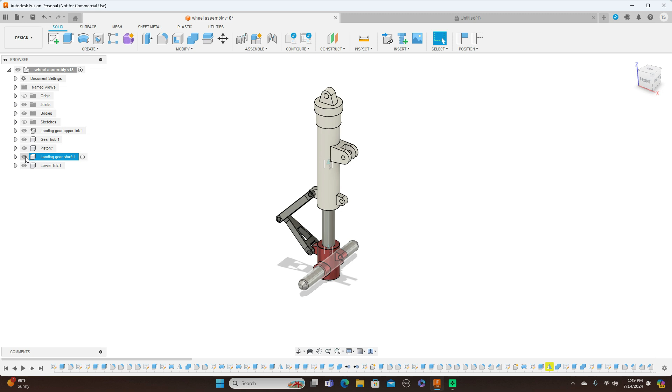Today I'm going to show you first how to do the lower link, and I'll show you what the lower link is here. Let me turn all this stuff off. Okay, and that lower link, we're going to make this today. So let's go ahead and get started here.

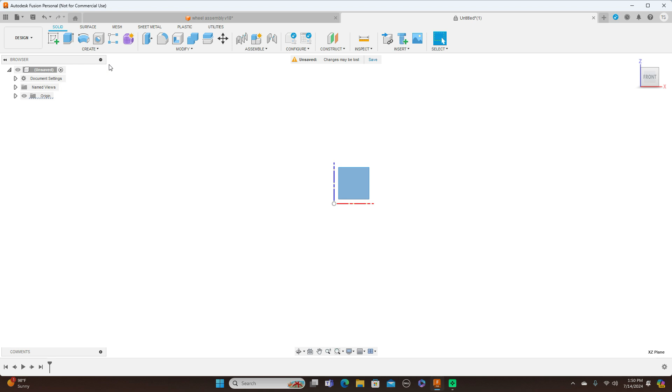Going to do this on the front plane here. Turn the origin back on so I can see it, and click this, because this is the plane I want to sketch on, and create sketch. Use the line tool, L for line. Want this line to be 10 millimeters.

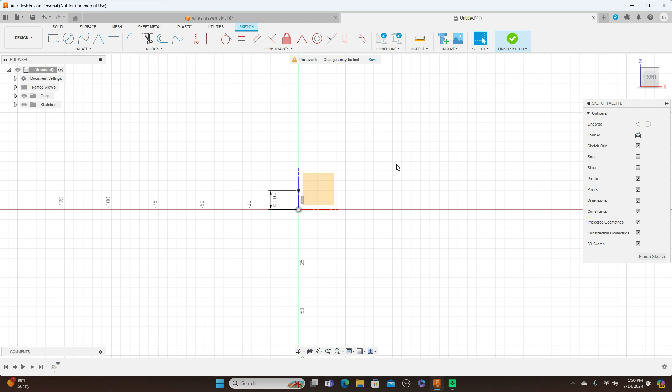Then I'm going to draw another line here. And I want this line from this line here to be 180 millimeters. So I'll come up here to this. Like that, that. And I want this to be 180.

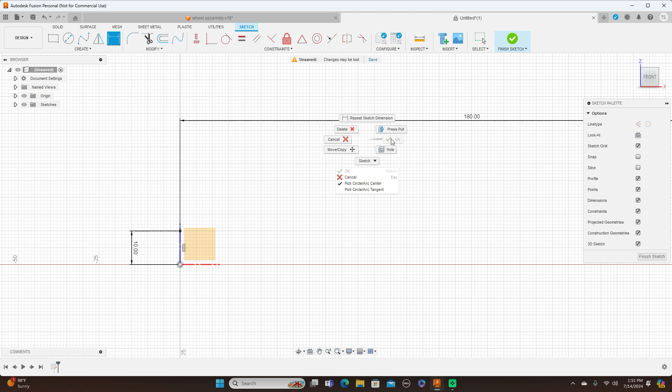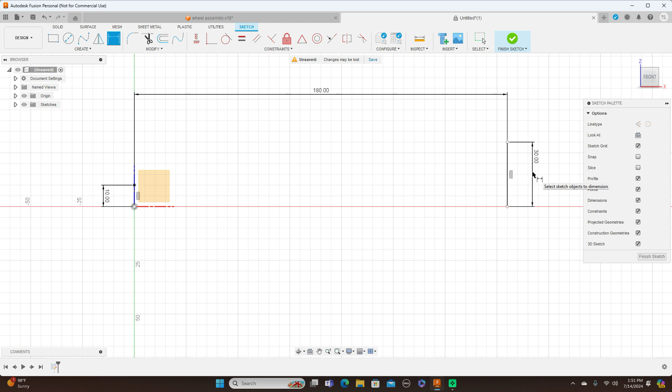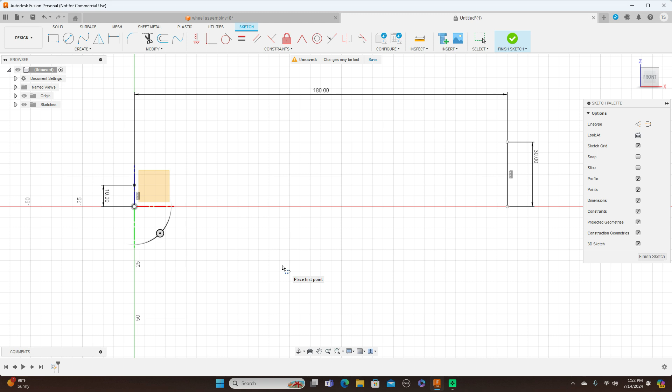And I want this line to be 30 millimeters long. And building this assembly is all parametric modeling. And now I want to draw another line. 15.

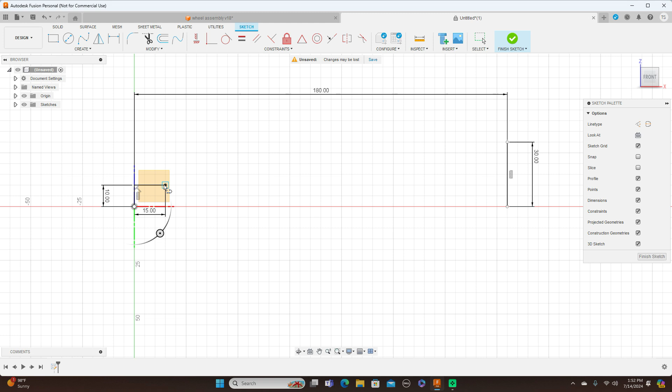Right now, this is just an approximation. And I want a line from here, 30 millimeters long. And I want a line from the bottom up here, 15 millimeters.

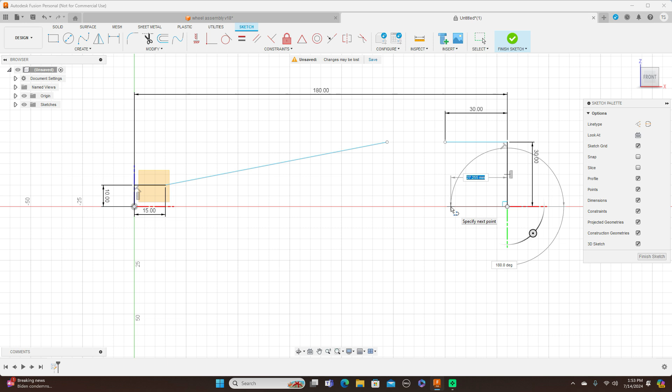Actually, I'm going to do one here first. And I want this 30. Up here, 15.

Delete this line here, don't need it. And trim this line here, I don't need this bottom half here. So T for trim, click that line, deletes that.

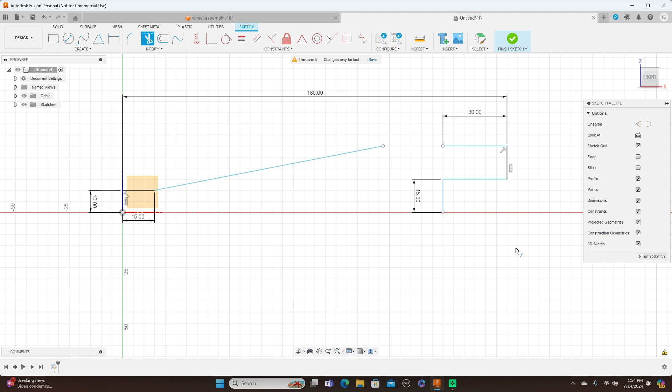And what I'm going to do here, cancel this and delete this line here. And draw a line from here to here.

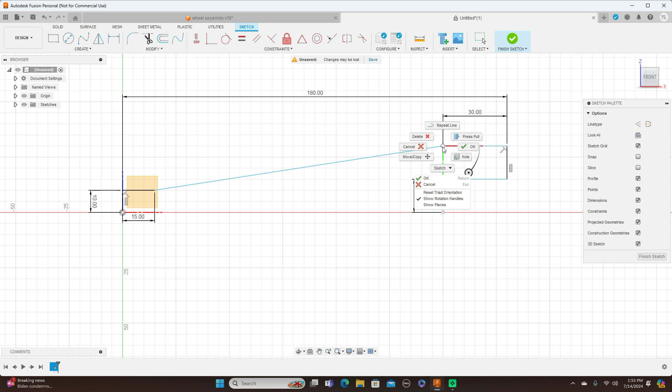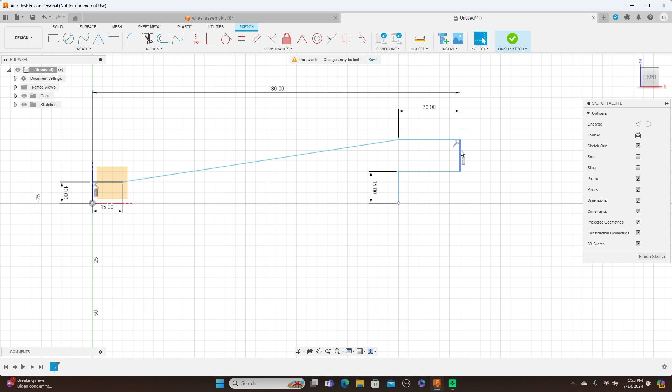Okay, here are our dimensions for this. This is 15 also. So we have this line 15, this line is 30, 15, 30. Overall length is 180, this line is 10.

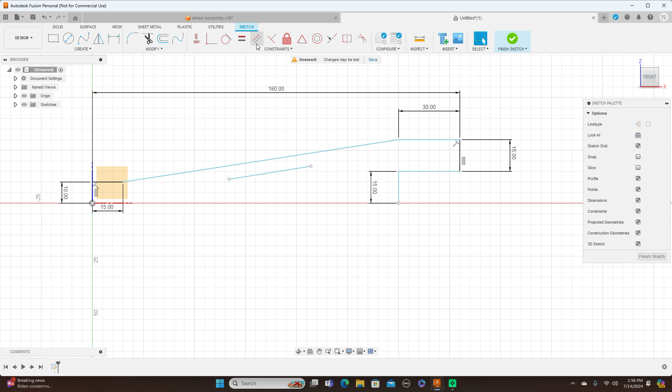Now I'm going to draw a line here. And this is an approximation. Now I want these two lines to be parallel, so I come up here, parallel, click this. Now those lines are parallel. Click OK.

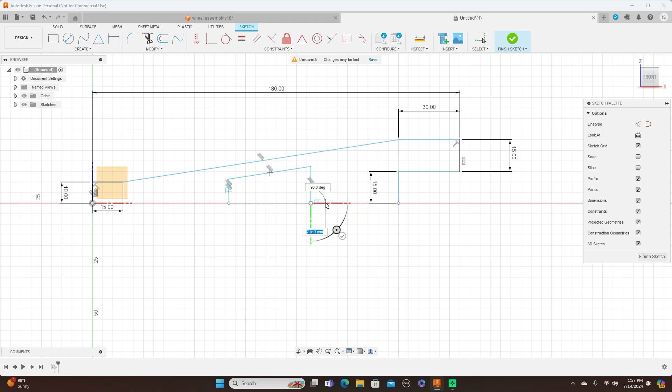Draw another line here. I want the distance from this line to this line to be 70. It moved the wrong one. Go back. Okay, just deleted that so I can do it again.

Don't want that, so I'll do the front one first. Go ahead and delete this, or I don't need to, just go back. Then delete this. So the front one, 20 millimeters between here and here. Okay.

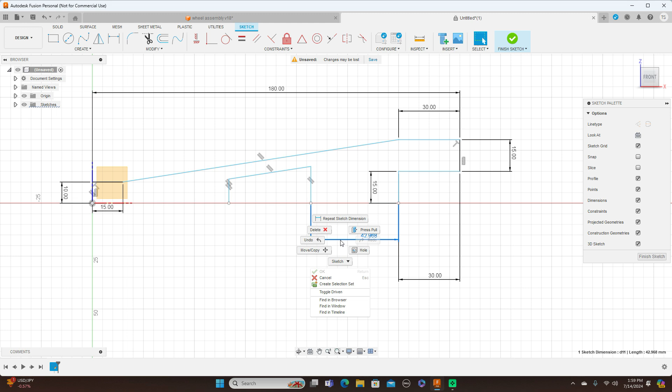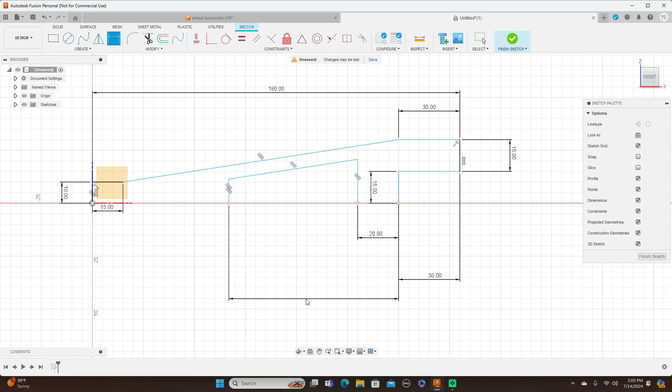And now, this line, I want this to be 20. And the back line, 70. From here to here, I want this to be 70. Okay.

Now we have all our dimensions in here. And what I'm going to do now is mirror all of this.

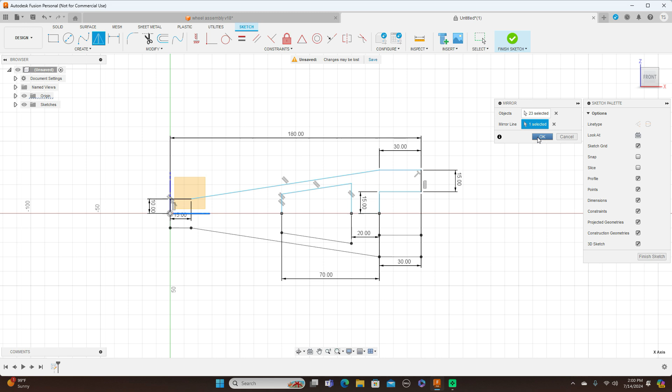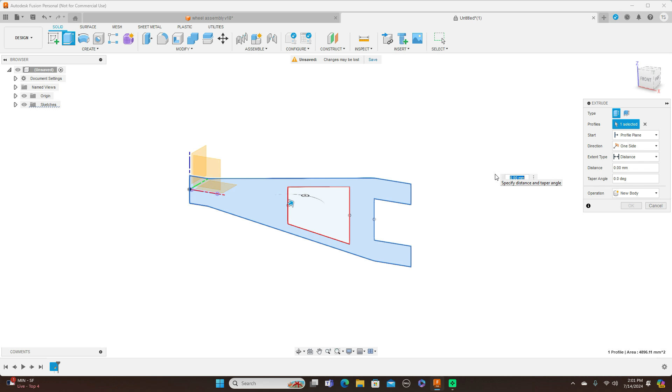Click OK. And this is what we have. Go ahead and finish sketch. Press E for extrude, select this profile here, and I want the thickness to be 25 millimeters. New body, click OK. We have that.

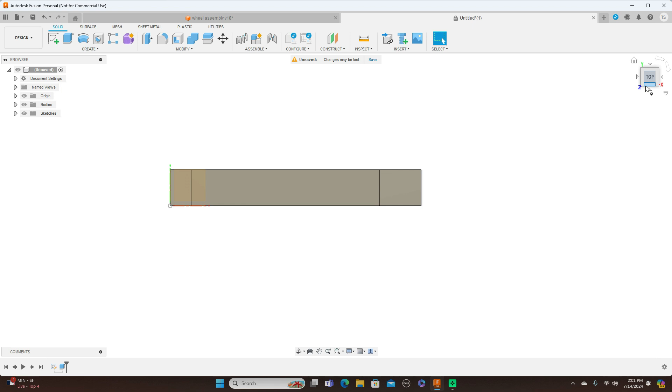Now on the top here, I want to create a sketch up here. Actually, I don't want to create sketches yet. I want to go ahead and add the roundness on these right here.

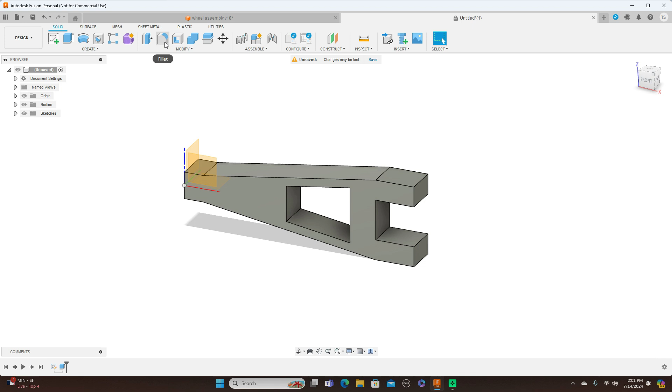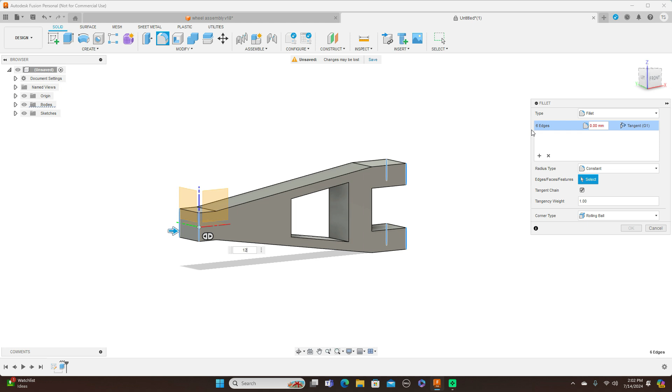So what we can do there to make those round is use a fillet. Come up here to fillet, click that. Click this edge, hold shift down and click these other edges. And I want those to be 12.5. Click OK.

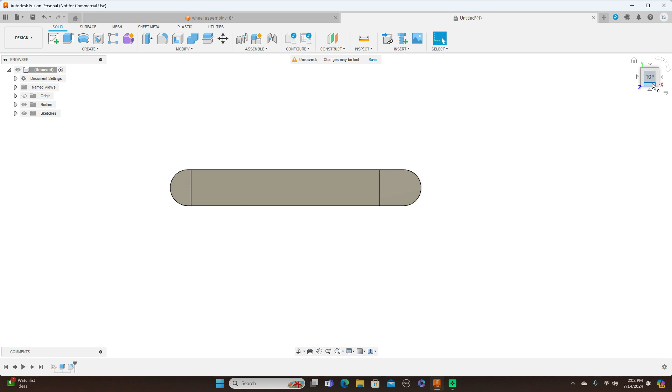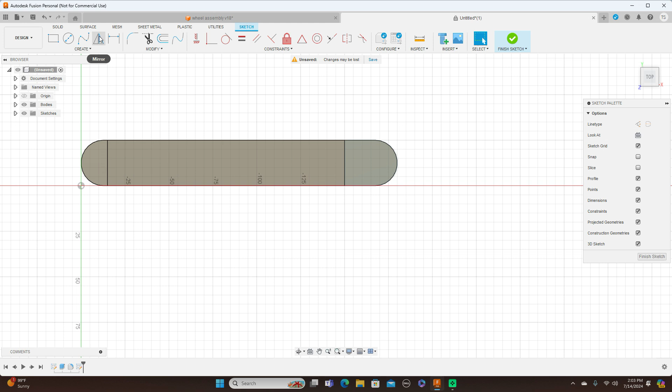Now to put the holes in the top, like here, these holes here. I want to create a sketch on this plane here. Create sketch. And I want to use this as a center. The holes are 15 millimeters. So select this. Click enter. Go ahead and finish sketch.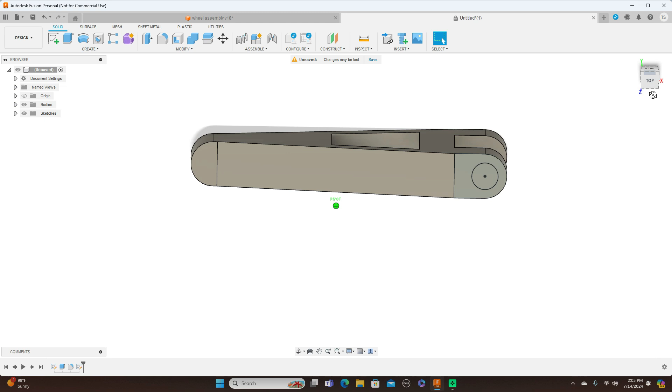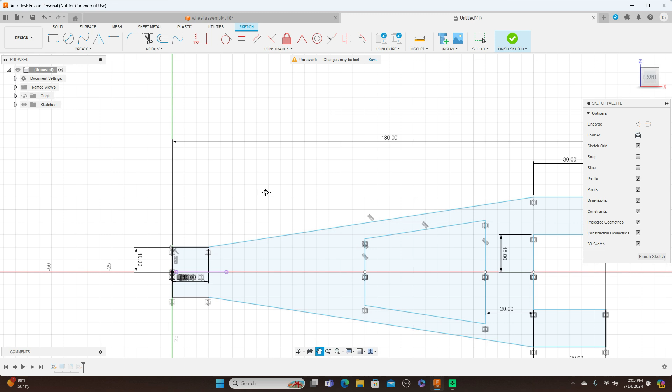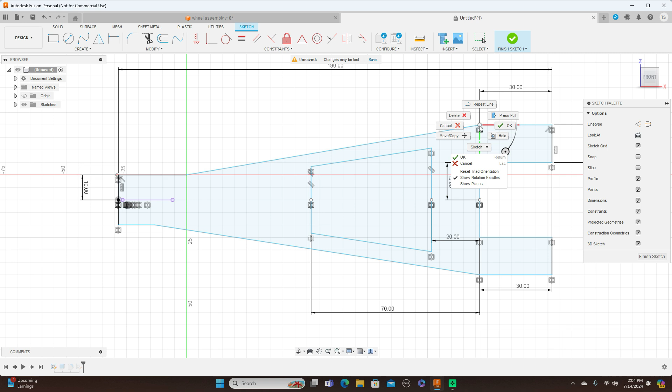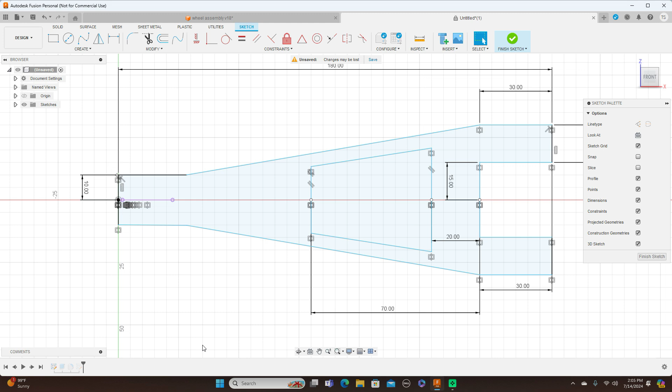Now I don't like this. Let me go back here. Delete this line here. Move this more this way. Go back to that sketch. Just changing this sketch around just a little. There, that's a little better.

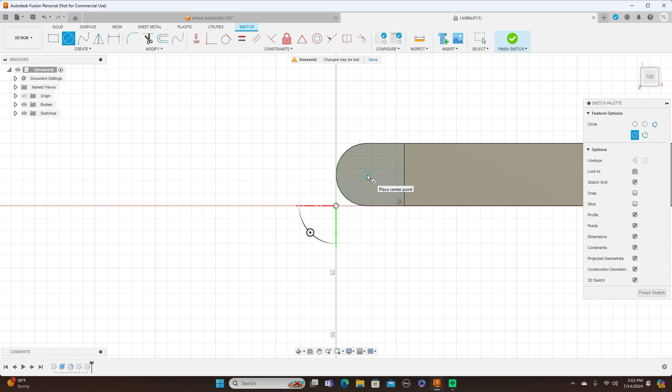Okay, now this plane here, create a sketch on it. And this is 15 also. All right, go ahead and finish sketch.

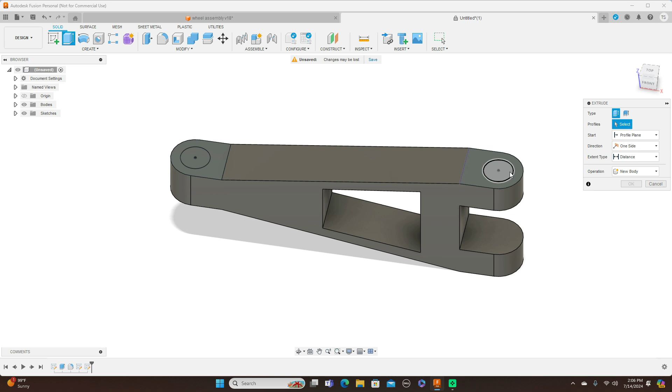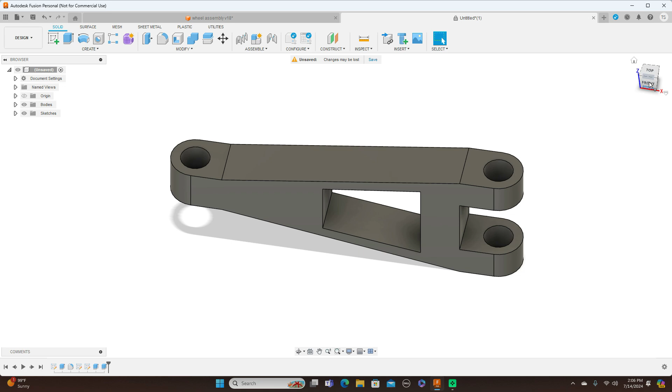And what I want to do now is extrude this here. Set this to cut. Click OK. Extrude again, this one, set this to cut. Down. Click OK. OK.

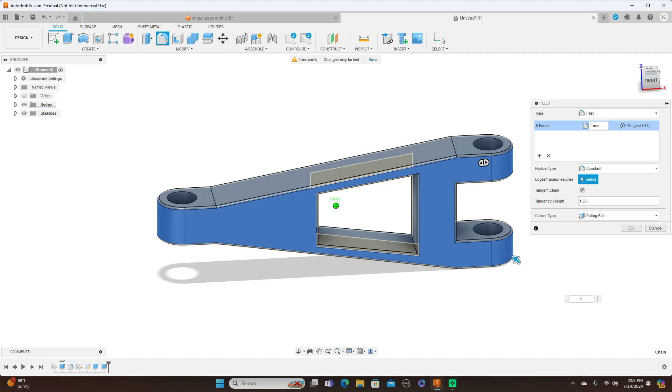Here's that part, still not done yet. Now we need to add some fillets to it. Select 1 millimeter. What I did is just selected the faces, so it did all of them at the same time. Go ahead and click OK.

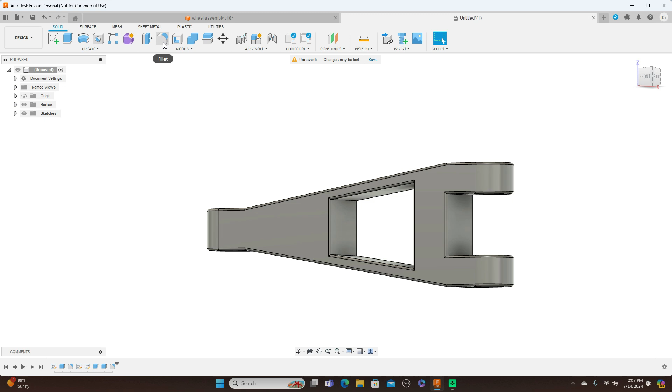Okay, this is the part now. Now what I want to do is just add a fillet in here also. So click fillet. Select this line, this line. And I want this to be 1 millimeter. Click OK.

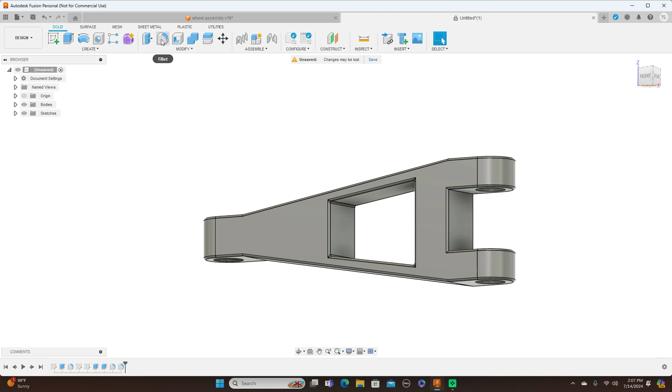And same here, fillet, this line, and I want it to be 1 millimeter. Click OK. OK. And that is our first part, the lower link.

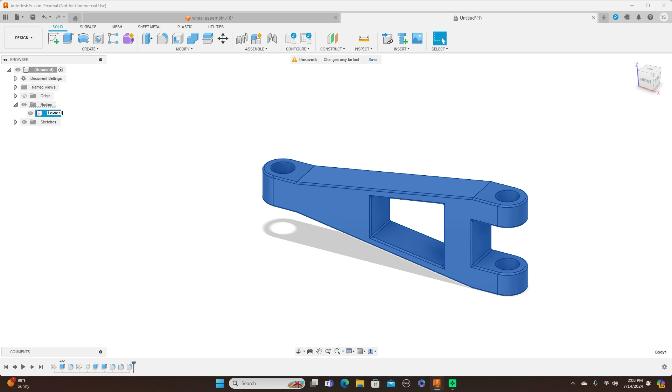So now we just come over here and change this to lower link. And that is the first part.

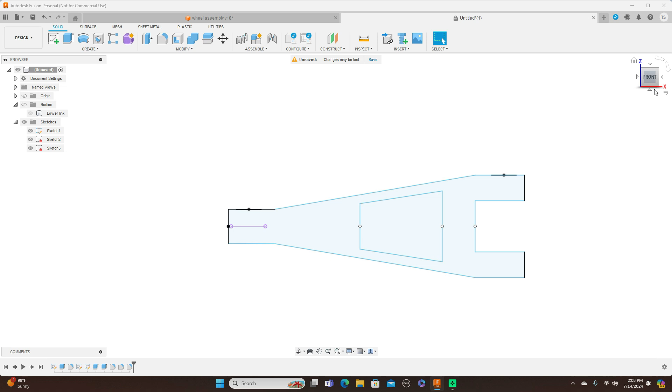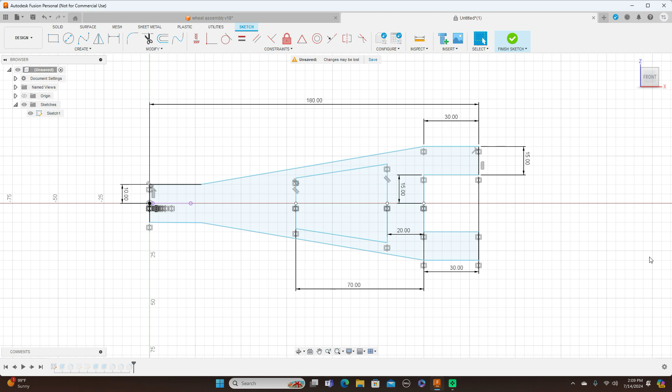Turn the bodies off here so you can see the sketch. Okay, and that is the sketch there. And if you want to see the dimensions, go back to Edit Sketch, and there you have the dimensions. So if you guys are doing this, go ahead and take a screenshot of this to get your dimensions that you want to use. But anyway, I'll finish sketch again, turn bodies back on, sketch is off, and there we have that.